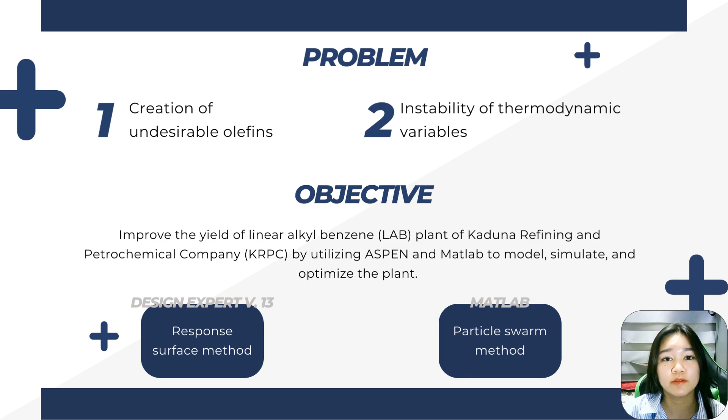For the optimization of the plant, the research article used the response surface method, which was carried out using Design Expert version 13, and the particle swarm method, which was accomplished in MATLAB.

Hello, this is Czarielle Penequito, and I'm here to discuss the materials and methods used for the optimization of alkyl benzene yield.

The applications used for the data collection were as follows: Aspen HYSYS version 11, Design Expert version 13, and MATLAB 2018B software.

Aspen HYSYS version 11 is developed to perform mathematical and chemical models and fully calculate engineering calculations such as mass and energy balance, equilibrium, heat and mass transfers, and more.

Similarly, MATLAB is a desktop application tuned to analyze and design processes using programming languages that express matrices and arrays.

Design Expert is a statistical software for conducting experiments that require a thorough examination of relevant information and variables, as well as experiment-related elements.

The process data were collected from the linear alkyl benzene plant log sheet of flow data sheet of LAB production process, or KRPC.

In order to replicate the operation of the Pacol and Detal units of the production system, feed data such as mass flow rate, temperature, pressure, and more were used as equipment operating parameters.

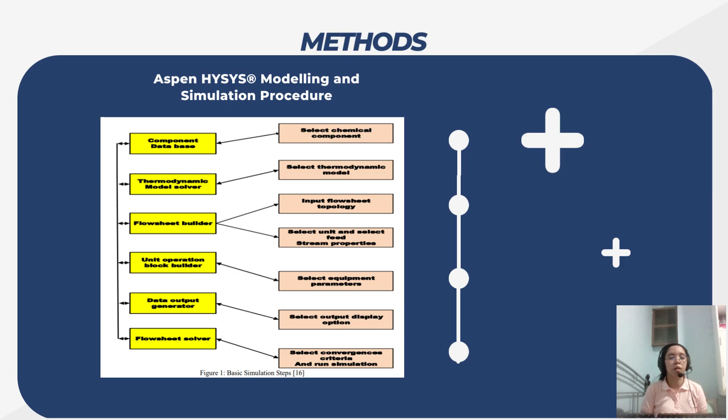The other methods used the applications Design Expert and MATLAB to optimize the developed linear model. Design Expert was used to perform the response surface methodology, or RSM.

The RSM is a useful tool to design systems with no mechanistic information. As a start, the researchers carried out a set of 30 experimental trials using the central composite design of the RSM.

Meanwhile, MATLAB was used to accomplish particle swarm, a method used for optimization and comparison purposes.

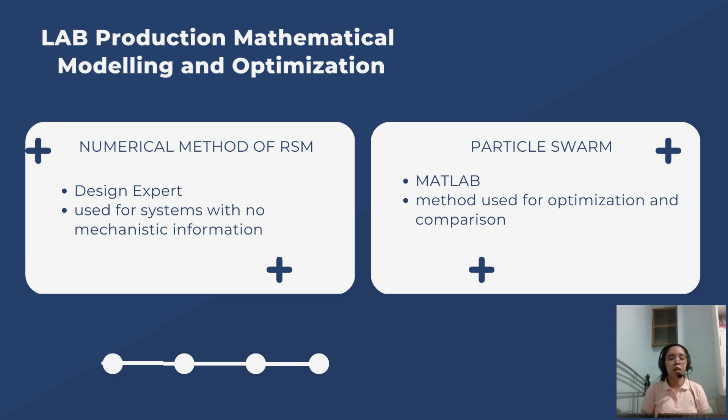Now, for the second research article, the optimization of linear alkyl benzene yield through modeling and simulation. Modeling and simulation of process systems is an important tool in reducing risk of operation, investment, and operating costs due to system failures, thereby improving the performance of the process systems.

Prior to modeling and simulation of the LAB plant of the Kaduna Refining and Petrochemical Company, or KRPC, existing data were collected from the flow sheet and operating manuals of the LAB plant of the company.

The data were then used for the simulation, and as can be seen in Table 8, it shows the results of the simulation of the LAB plant testing different thermodynamic models.

The thermodynamic models used were the Peng-Robinson model, the Wilson model, the non-random two liquids ideal models, the UNIQUAC model, and the Soave-Redlich-Kwong thermodynamic model.

It can be observed that the Peng-Robinson model is the only one that has a positive difference in terms of the simulation yield compared to the actual plant yield. This fluid package resulted in 3,800 kilograms of LAB per hour, which was higher than the plant's LAB yield of 3,788 kilograms per hour as obtained from the datasheet. Comparing the plant yield to the simulation yield from each fluid package, only Peng-Robinson showed an improved yield, with a 0.316%, or 0.32%, increment—a positive difference.

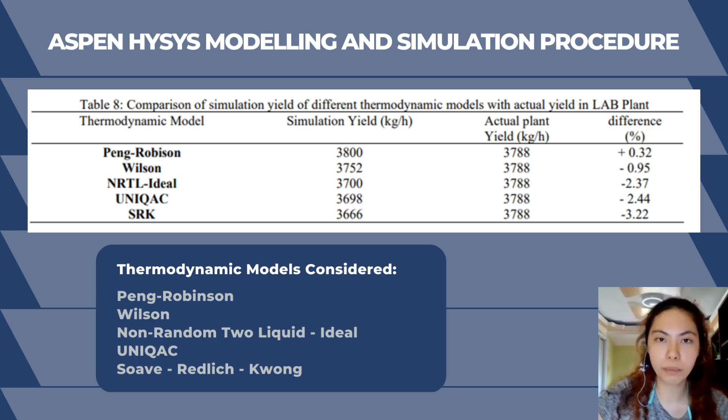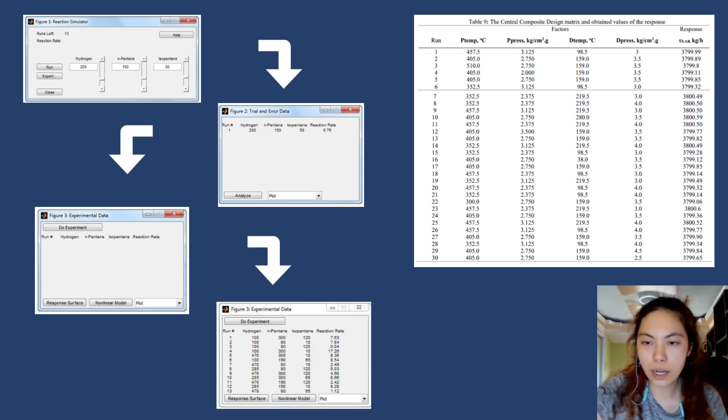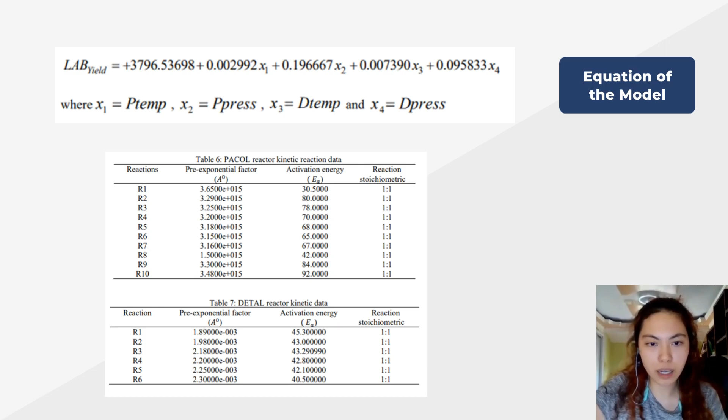Using the design matrix data given in Table 9 earlier, a model relating the LAB yield and the operating conditions of the Pacol and Detal reactors—the independent variables of temperatures and pressures—was developed. This was developed using the model given in Equation 1, as shown here, and in Table 7. This equation was actually derived using this design matrix, Table 9.

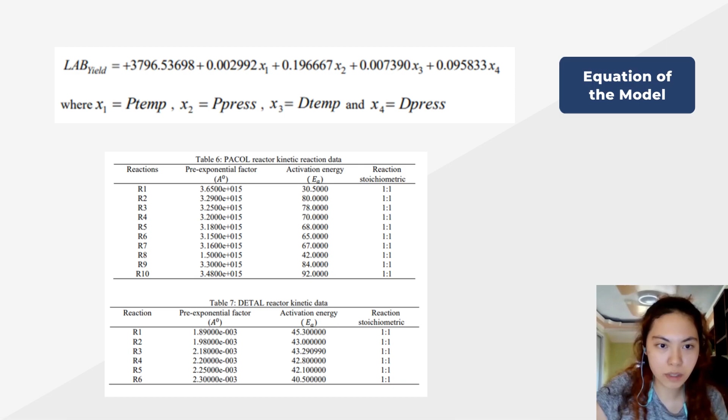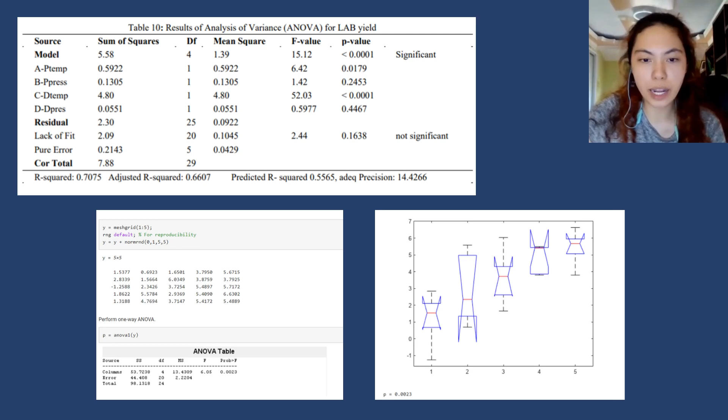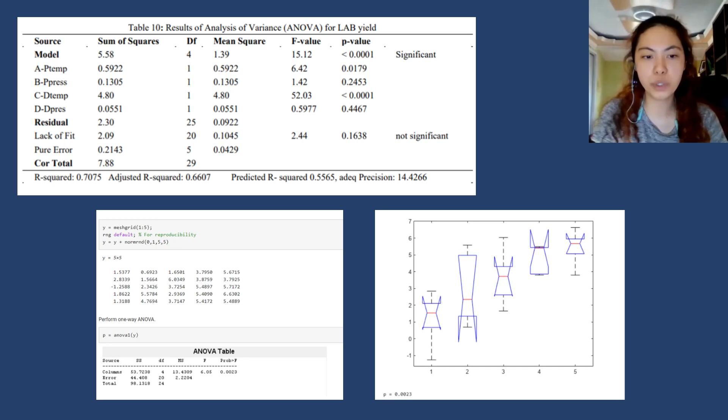As noted in Table 10, the Pacol temperature A and the Detal temperature C were significant in terms of the model, with p-values of 0.0179 and less than 0.0001 respectively—both less than 0.05, so they are considered statistically significant.

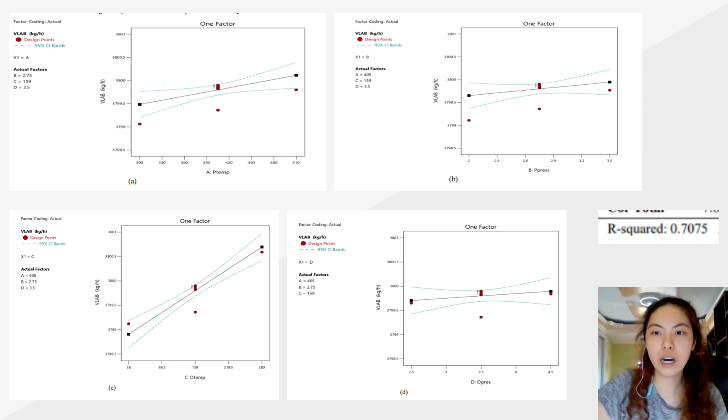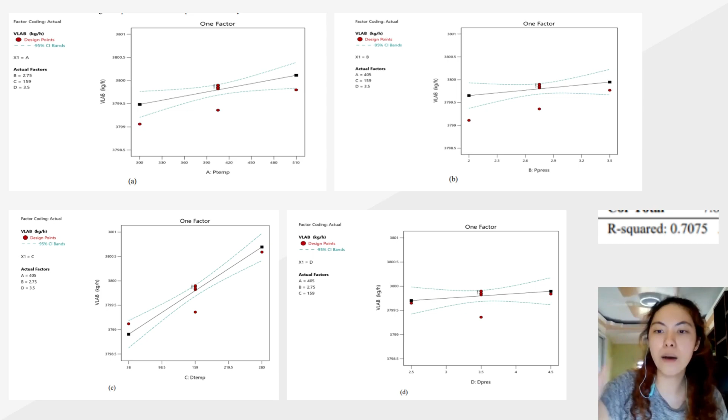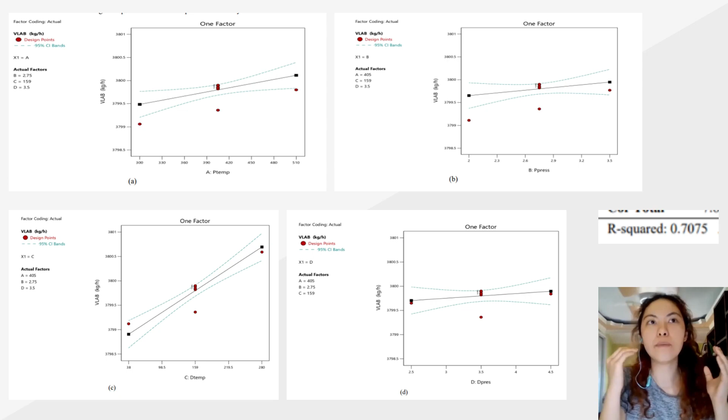They are increasing, but if we extended the slope with much higher pressure in the Pacol and Detal reactors, it could result in a straight line that would not generate significant changes anymore. Thus, it would not yield more LAB compared to the graphs of the Pacol and Detal reactor temperatures. So we can say that temperature is the factor, or independent variable, that most affects the percentage yield of LAB at the end of the process.

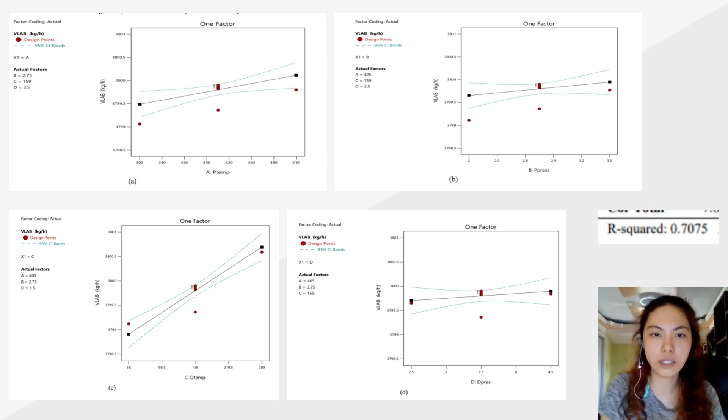The obtained R-squared value of the model was 0.7075, meaning the model was able to explain more than 70% of the variations in LAB yield, which occurred as a result of changes in the considered independent variables—significantly, in terms of temperature.

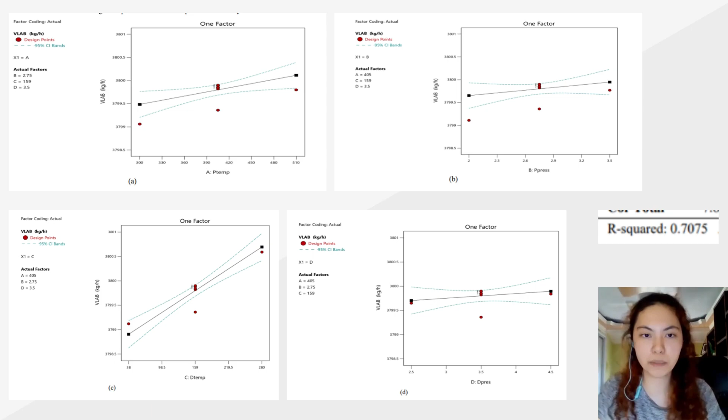But pressure can also contribute. All of them contribute, but temperature contributes much higher results. The study found the following results from this simulation.

For the thermodynamic model variation study, it has been found that the most efficient model is the Rasmussen's SRK, or Soave-Redlich-Kwong model. In this model, they obtained 3,800 kg per hour yield of LAB, while the least efficient model is the Peng-Robinson model, which garnered 3,666 kg per hour.

More than proper selection of thermodynamic model, process condition settings are optimized via particle swarm and RSM utilizing MATLAB. Results show that the RSM optimization generated optimal temperature and pressure for Pacol, which is 457 degrees Celsius and 2.32 kilogram per square centimeter gauge.

While for Detal, the temperature is 275.69 degrees Celsius and the pressure is 2.82 kilogram per square centimeter gauge. The optimal yield obtained was 3,800.669 kilogram per hour of LAB, quite similar to the Rasmussen's SRK model.

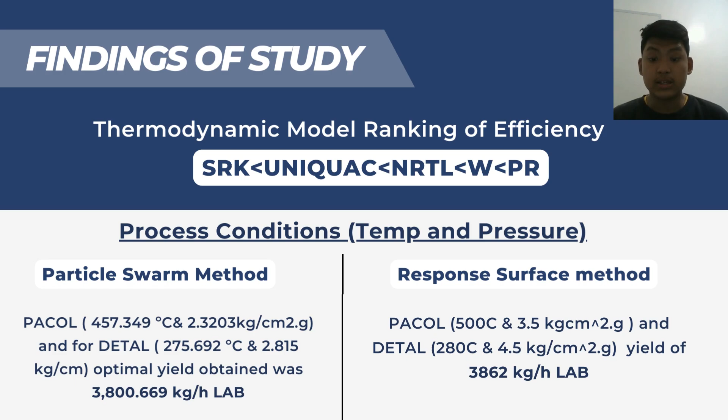Ultimately, a model has been developed relating the operating conditions and LAB yield with the R squared equaling 0.7075, which indicated that the model was able to explain more than 70% of the variations in the LAB yield result, which occurred because of the change in the independent variables. This only shows that this model is more than 70% reliable in proving that the yield obtained from this relation is quite true.

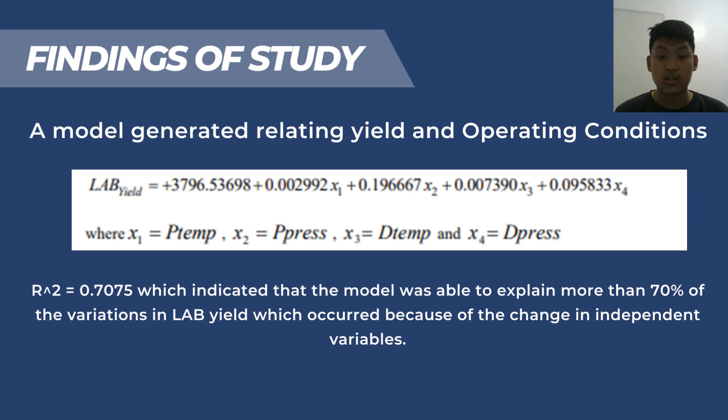We have also modeled a relationship for the yield involving the independent parameters such as the pressure and temperature of Pacol, and that proved 70% reliability. Also, it has validated, as we have seen, that the actual yield and the optimized yield are quite near.

The second research article is titled Techno-Commercial Analysis of LPG Recovery from Natural Gas Using Aspen HYSYS by Ahmed Mohamed Inua, Saidat Olanipekun Diwa, and Atuman Samaila Joel.

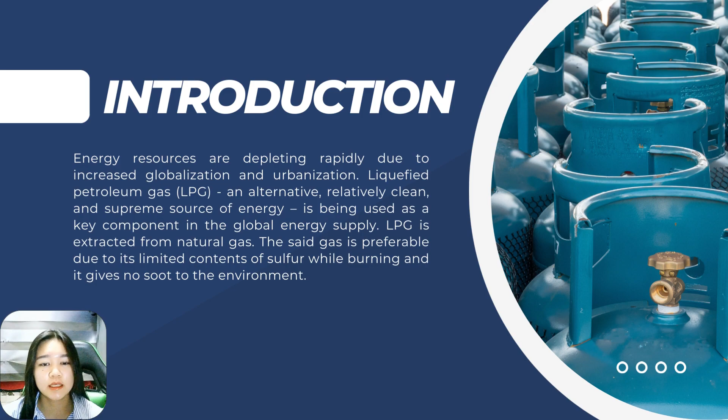Energy resources are depleting rapidly due to increased globalization and urbanization. Liquefied petroleum gas, or LPG, an alternative, relatively clean, and supreme source of energy, is being used as a key component in the global energy supply. LPG, which is designated as butane and mainly propane in an engineering context, is extracted from natural gas. The said gas is preferable due to its limited sulfur content while burning and because it gives no soot to the environment.

With various alterations and proposals available in literature, the effect of cooling, disposition, and rerouting the process streams is seldom reported. As a result, this research work is focused on improving the yield of LPG production by altering the process of cooling or its orientation in the separation and dehydration section of the natural gas processing plant. Three cases are studied in this research work to increase LPG recovery from natural gas by analyzing their cost and process parameters.

In case study 1, the feed is pre-cooled through a cold box. The position of the chiller will be placed in the separation section in case study 2, while in case study 3, the position is in the dehydration section. The case studies and their variations will be further explored in the methodology.

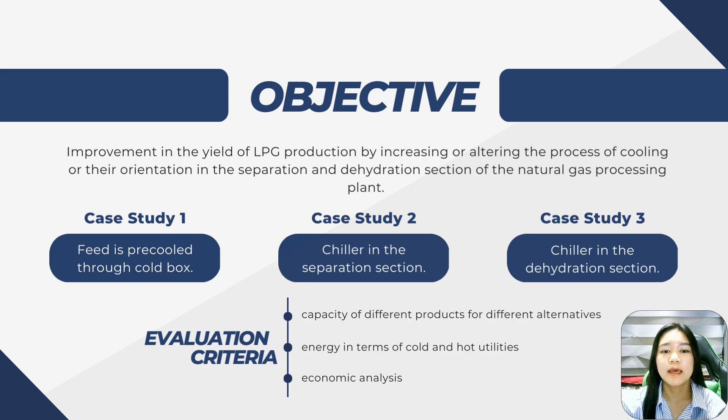As this research work is based on modeling and simulation to improve the currently used recovery processes in the industrial sector of Pakistan, the aim of this research is to study the varying flowsheet alternatives and compare their performances. The evaluation criteria will be the capacity of different products for their different alternatives, energy in terms of cold and hot utilities, and lastly, economic analysis.

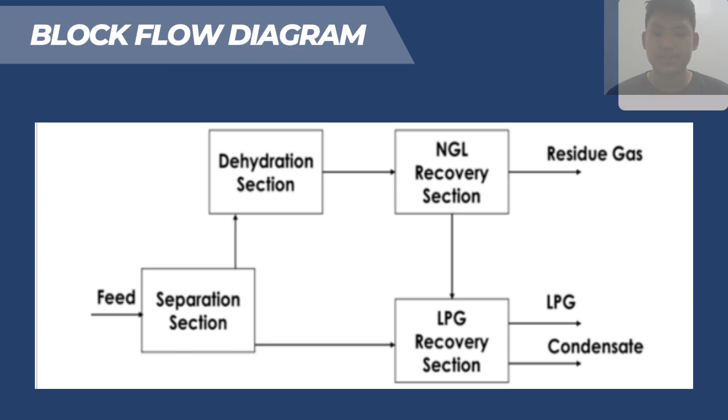Here we have the block flow diagram for LPG production from natural gas as shown in the figure on the screen. It indicates that LPG production from natural gas is composed of four subsections. Initially, the feed is treated, designated by the feed separation and dehydration section. Later, NGLs are recovered using a refrigeration loop and a cold box. Then LPG is recovered and attained by the use of distillation columns, indicated as the NGL and LPG recovery sections. So let's get into the PFD, or the more detailed process of LPG recovery.

The feed treatment section consists of removal of heavier hydrocarbons and water from natural gas before its processing, and it consists of two subsections: the first is a separation zone, and the second is a dehydration zone. In the separation section, composition is analyzed, and to avoid moisture buildup, a saturator is installed. Because of the sensitive nature of the material of construction of the downstream cold box, water is desired to be extracted in a three-phase separator. For LPG recovery, greater pressure is recommended.

Hence pressure is set as high as 600 psig, and a dry gas stream containing zero impurities is recommended in the process. Any free H2O is extracted from this stream, and this separator will remove higher hydrocarbons, mud, and water from the stream. A stabilization unit is also installed to stabilize the condensate, and heavy liquids are removed from the stream and converted into fluid fuel.

Next, the dehydration section further removes traces of water through the use of molecular sieves. Compared with other dehydration techniques, molecular sieves have relatively higher efficiency to extract maximum water content from the natural gas feed stream. These sieve beds, in tandem or parallel arrangement, can be regenerated and reused by heating, so that's very efficient and sustainable. In general, parallel orientation of two beds is recommended in LPG production.

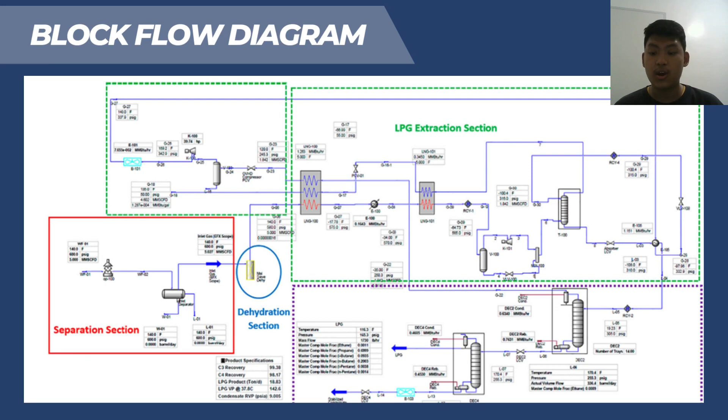Finally, LPG extraction is the closing and conclusive section of the stated scheme, and the ultimate amount of C3H8 and C4H10, named LPG, is recovered through this section. Distillation columns such as the debutanizer and the deethanizer will take out the required hydrocarbons completely.

Hello, I'm back again, but this time I'm going to discuss Aspen modeling used in LPG recovery. It was mentioned before that Aspen is developed to perform mathematical and chemical models and fully calculate engineering calculations such as mass and energy balance, equilibrium, heat and mass transfers, and more. It is extensively utilized in industry and academics and is often used for steady state and dynamic simulations. It addresses problems that first principle models cannot solve, and a first principle model reflects the physical laws and is often dependent on the relationships of a particular unit operation in a chemical process.

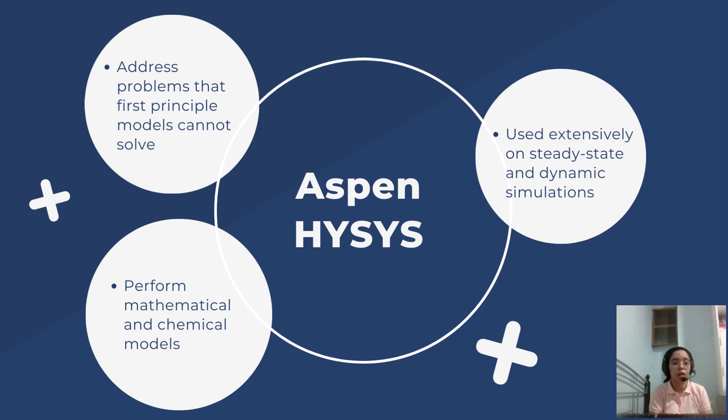So how was Aspen used in this research? The researchers used Aspen to make LPG recovery more energy and economically efficient, and to obtain maximum yield from natural gas with increased purity. They used Aspen to simulate a steady state, divided into sections: the separation zone, the dehydration zone, the NGL extraction zone, and the LPG recovery zone.

This is then integrated into the primary flow pattern. The produced result of the model is further utilized to calculate the physical, chemical, and overall exergy of each auxiliary. The complete exergy analysis performed on the liquefied petroleum gas recovery plant provided specific points of inefficiencies in the previous model, prompting the use of the Peng-Robinson equation of state and a base case steady-state model developed in Aspen.

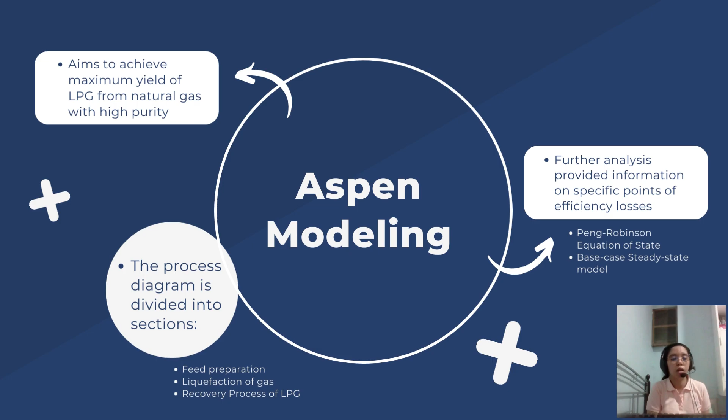Case Study 1: Cooling process is directly proportional to the recovery of LPG. The conversion into liquid form and production of LPG will be increased. Temperature of feed is decreased and separation is more perfect. Maximum liquid is extracted from the stream through a separation process, and due to its extraction from the stream, this leads to a low content in the downstream gas.

Case Study 2: Change the chiller position from the LPG extraction section to the separation section. The temperature of the feed stream is lower than in Case Study 1. It goes from 140 Fahrenheit in the base case to 17.7 Fahrenheit in Case Study 2. The major portion of water in the separation section and heavy hydrocarbons are removed.

The stream is directly sent to the LPG unit without passing through the dehydration as well as NGL extraction sections, favorable in terms of capital as well as operational cost. A decrease in size of equipment and cost results are obtained with this arrangement.

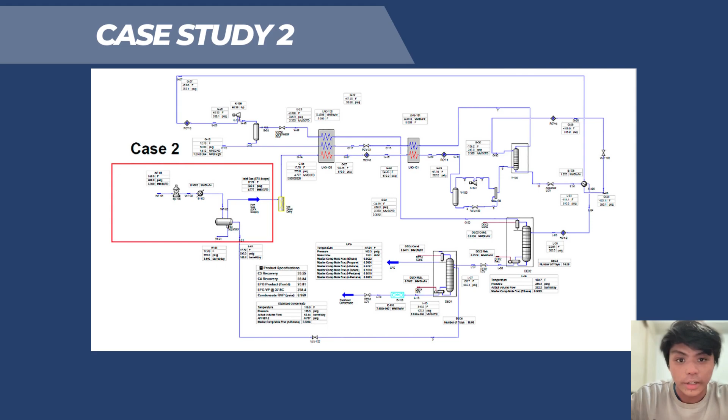Case Study 3: The position of the process equipment is changed. The position of the chiller is moved from the NGL extraction zone to the dehydrating zone. Inlet gas entering the dehydrating zone is chilled by this change. The size of the bed is lower than the base case and other cases.

Temperature decreased to about negative 9.2 Fahrenheit from 140 Fahrenheit. Molecular sieve volume is also decreased by decreasing the size of the bed, so a lower volume of molecular sieve will be required. Activity of the molecular sieve in the base case will last longer than in the present case.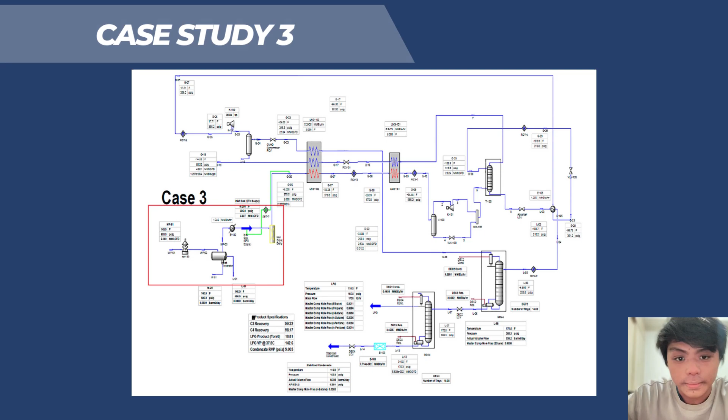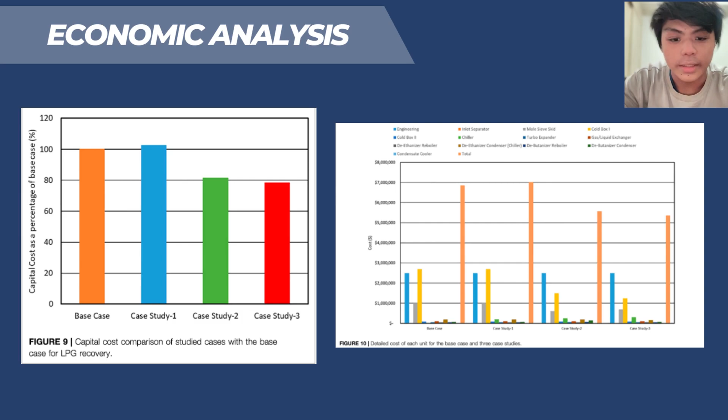The objective of this research study was to investigate the capability of liquefied petroleum gas recovery performance, to make the process economical by saving processing cost and energy. Various flow sheet alternatives were studied, and comparisons were made of the performance of each case study.

The results were evaluated based on the capacity of different products for the different alternatives, energy in terms of cold and hot utilities, and economic analysis. Through Aspen HYSYS, a steady-state simulation model was prepared. The flow sheet was decentralized into four zones: the separation zone, the dehydration zone, the NGL extraction zone, and the LPG recovery zone.

In the base case steady-state model, the Peng-Robinson equation of state was used to conduct a complete exergy analysis of the liquefied petroleum gas plant, to find the specific points of efficiency losses.

Based on the exergy analysis made, the NGL recovery process through modeling and simulation in Aspen HYSYS indicated that most of the exergy destruction happens at the air cooler and the column present in the flow sheet.

In Case Study 3, gas cooling is accomplished just after separation and is upstream of the dehydration section, with optimized size specification of the molecular sieve dehydrator bed and low temperature absorber.

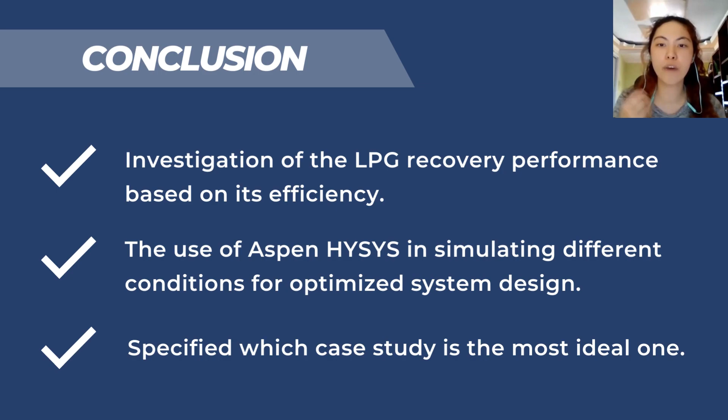Furthermore, the turbo expander and low temperature absorption configuration system produced greater recovery of liquefied petroleum gas, with 1,110 pounds per hour of LPG obtained out of 5 million standard cubic feet per day of raw natural gas, with a maximum purity of 99.9%.